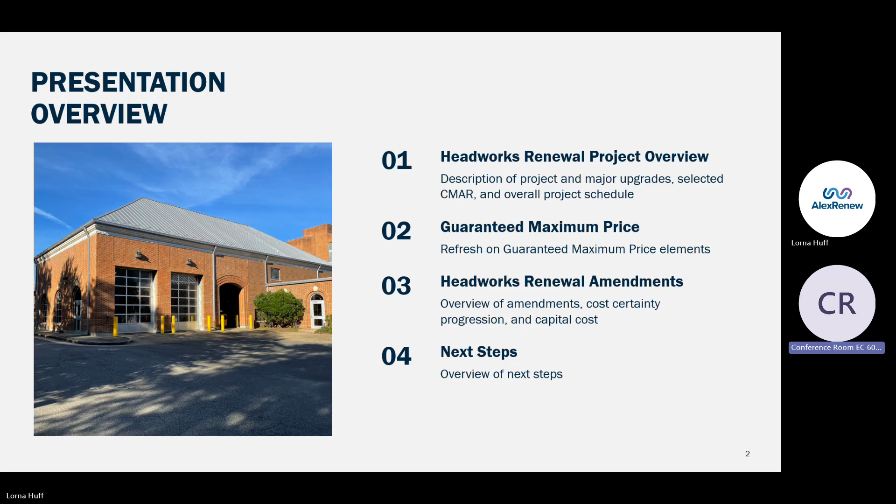Then I'll go over the guaranteed maximum price and the elements that entails. I'll then go through the Headworks renewal amendments specific to this project, an overview of those amendments, a graphic showing the progression of cost certainty moving from the start to the end of the project, our current estimated capital costs, and ending with an overview of the next steps.

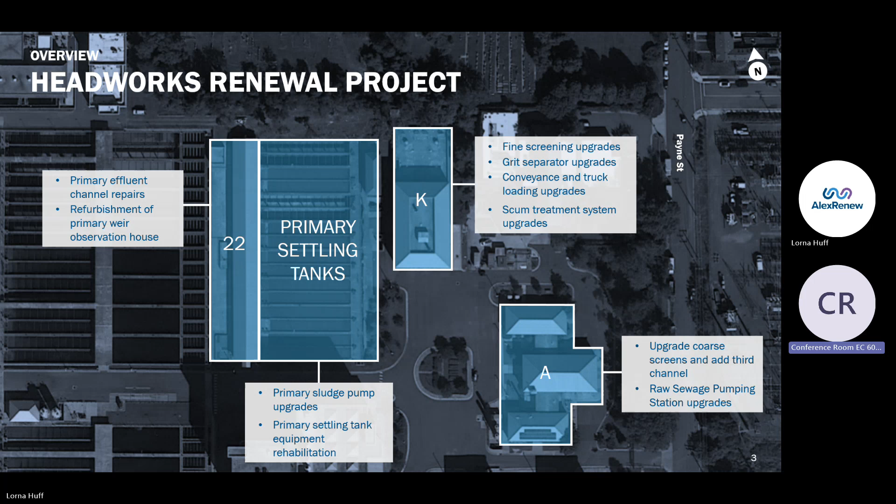We have the primary weir observation house covering those weirs to contain odors. And the last step of the Headworks Renewal Project is the repair of the primary effluent channel, where all that wastewater comes together and flows down to the primary effluent pump station and then continues on through the process. That's kind of the 1,000-foot view.

Diving a little bit deeper. Next slide. Along with some pictures of the equipment as we have it right now.

The coarse screens will be upgrading the two existing screens with new technology, and also adding a third coarse screen channel. The reason for the third coarse screen is to allow us to pass 120 MGD with one screen out of service. That gives us a layer of redundancy and resilience for the process.

In similar fashion, we're upgrading the raw sewage pumps with new pumps, valves, and piping to also give a firm capacity of 120 MGD. What that looks like, we have 2 rows of 3 pumps each. We'll be able to meet 120 MGD pumping capacity with 2 pumps in each row in service, so 1 out of service on each side.

In building K, our fine screens and grit removal systems are both being upgraded to more efficient and effective technology to take that debris out of the wastewater stream and avoid damage to equipment downstream in the process.

And then we'll be improving both the grit and screen conveyors and upgrading the truck loading facility. Right now it's just a truck parked in with several chutes that drop the screens and grit into the bed. We'll be upgrading that with automatic leveling roll-off containers to essentially have a single chute, but moving the container from side to side to automatically level the material in the bed. That's important so our staff don't need to go up and manually rake to level the equipment, which is both time consuming and can be hazardous.

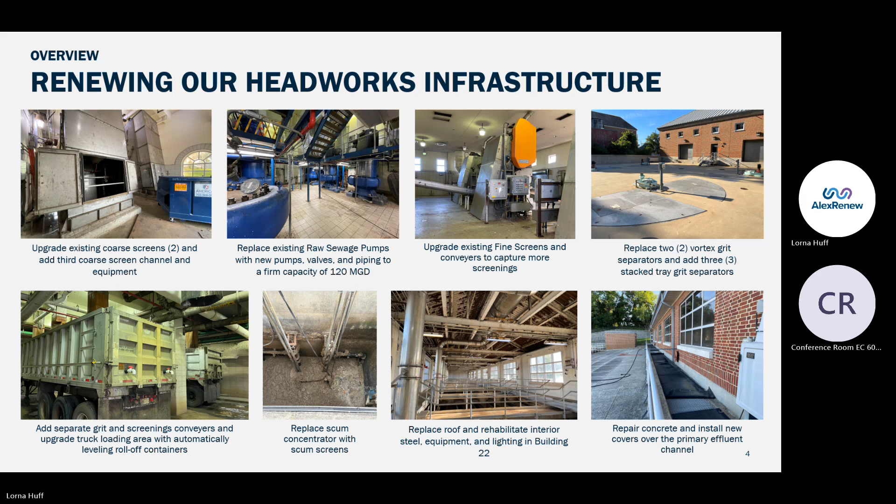So Ulliman Schutte has been selected as our CMAR for the headworks renewal project. They received board approval to provide pre-construction services in July of last year, and they've been working closely with both us and GST, our engineer, in developing the design and providing critical and helpful constructability feedback throughout the project. They have over 25 years executing wastewater projects in the Mid-Atlantic, with a regional office in Chantilly, and extensive experience in construction of liquids process upgrades at active wastewater plants. The image in the background is actually from one of their other large projects with the same coarse screens that are going to be installed here.

And they have experience with over 20 CMAR projects, including AlexRenew's NMF, which is underneath the soccer field here.

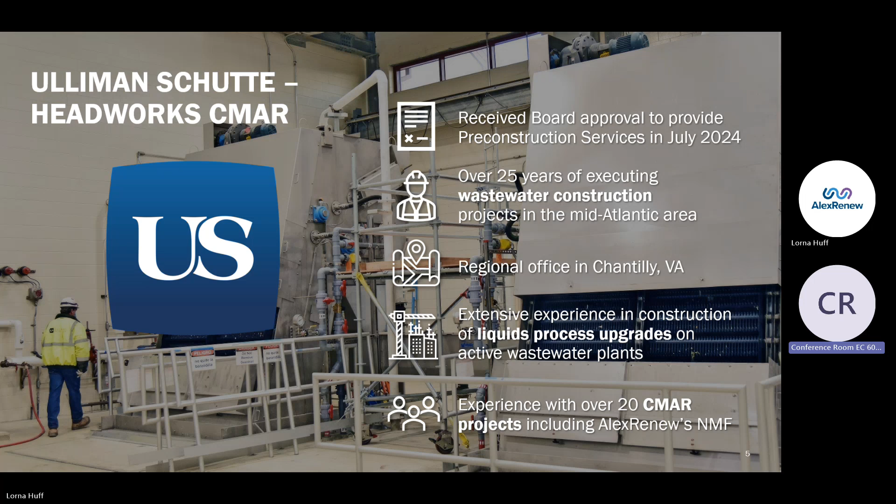This slide gives an overview of the project schedule. Currently, we're at the tail end of second quarter 2025. We're complete with procurement and preliminary design, and coming up is a year of pre-construction services and final design with our engineer and CMAR. We've also noted on the timeline roughly where the amendments are expected to go to the board. Construction will start at the beginning of 2026 and proceed through early 2031.

What is the level of design at this stage? So the design is being progressed for each amendment.

Amendment 1 is at 90% design. Amendment 2, we're in the process of finalizing 90% design. Amendment 3 is still working on 60%. Amendments 4, 5, and 6 are still below that, around 30% and moving up from there. So it's hard to average that out since there are different sizes.

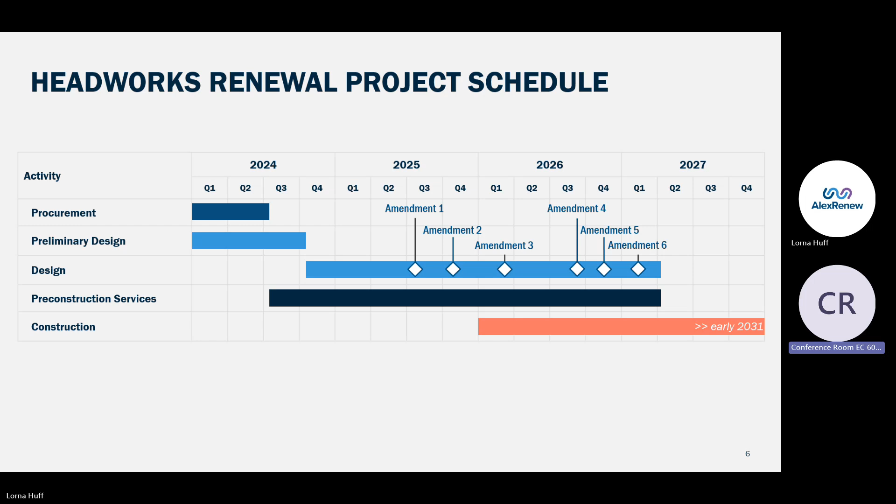Question on GMP: once you agree on a dollar amount, what happens with tariffs, changes in regulation? What kinds of things come up, and how do you handle them? We do our best to account for those, because we're working with the contractor, and they're able to go out to their suppliers and get a feel for how tariffs or other regulations might impact costs. If something fully unexpected occurs, we do have the option to find an equitable solution for covering additional costs that could not have been anticipated.

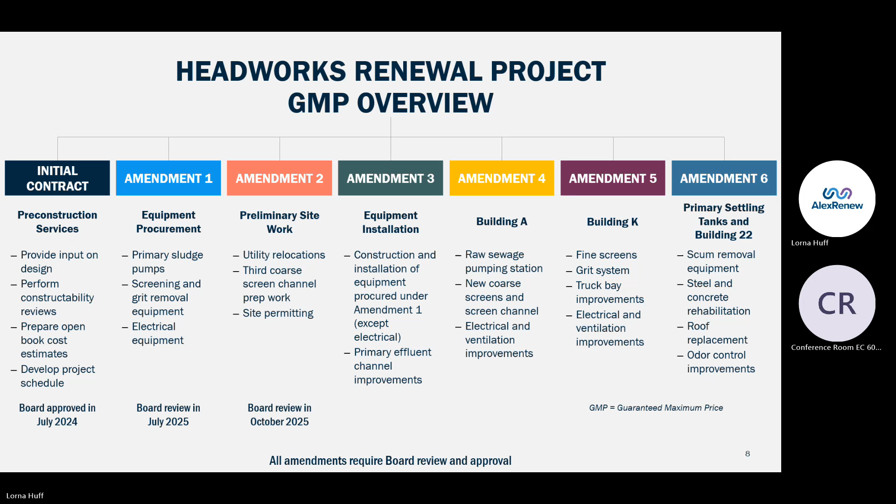Amendments 4, 5, and 6 cover improvements to Buildings A, K, and the primary settling tank respectively. One of the main reasons for this ordering is Building A is going to be the longest portion of work, so we want to get that started first, and avoid pushing out the schedule.

This kind of answers your questions - think about where we stand today, we're at maybe overall 30%. By the time we get to amendment 3, we're overall probably near 60 to 75%. By the time we get to amendment 6, we're at 100%. So that gives you an idea of the heavy design work in the back end of this job, from amendments 4 through 6.

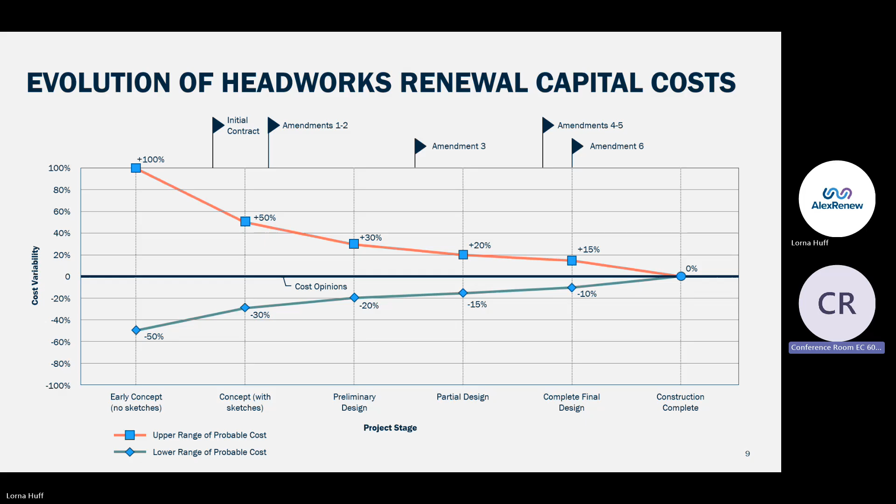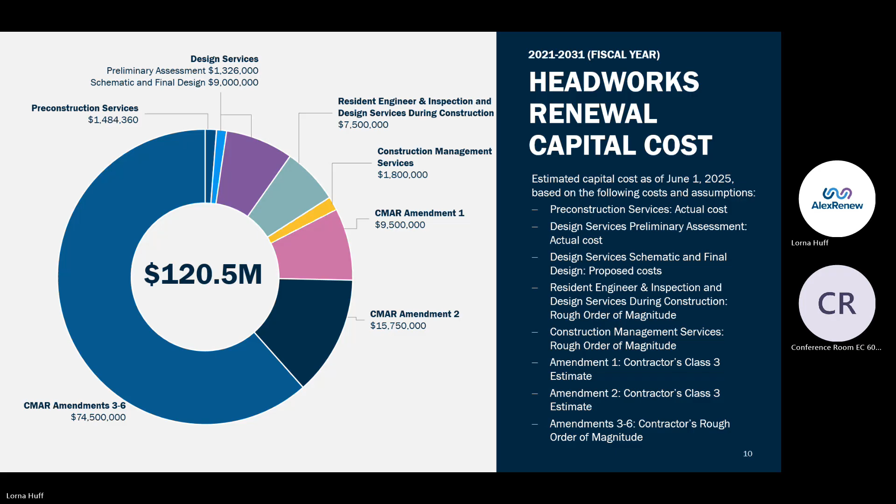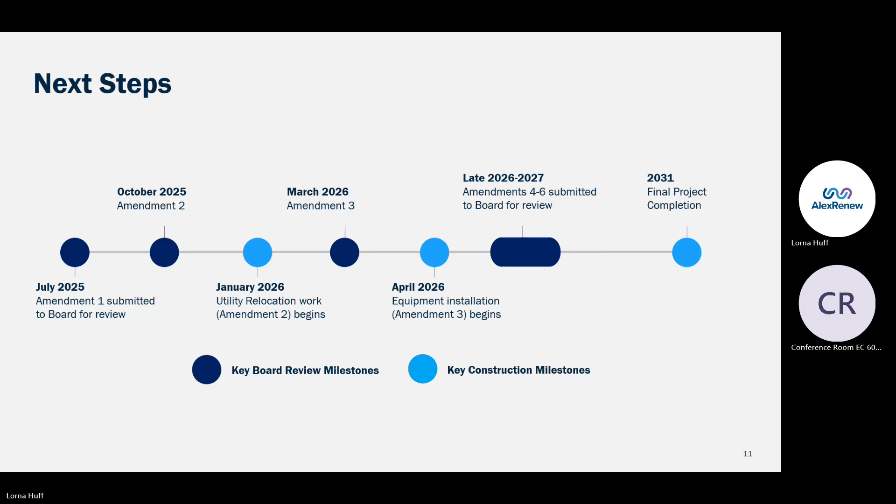That's the end of my presentation.

I've got to say, this is exactly the right level of detail to present to the board. It's really perfect, because you're conveying what you're doing and presenting the risk and cost associated with it. So it's really well done.

So we got a ways to go - 2031, right? But we've come a long way this year. Yeah, no, things are happening. This is great. Wonderful. Thank you, Mr. Chan.

Moving right along to the Commonwealth inflow infiltration study.

So, just a quick overview while we get Mr. Cronin and Dr. Carver up to the front of the room. The city and AlexRenew have been coordinating for the last 18 months or so on the Commonwealth Interceptor infiltration and inflow study. It's been a year since we initially talked to the board last May about where we stood as we kicked off the I&I study.

Really, it's a modeling effort to determine what's effective in managing infiltration and inflow in the Commonwealth sewer shed. So tonight's an update on where we stand with respect to the study and next steps. With that, I'll turn it over to Mr. Cronin to pick things up.

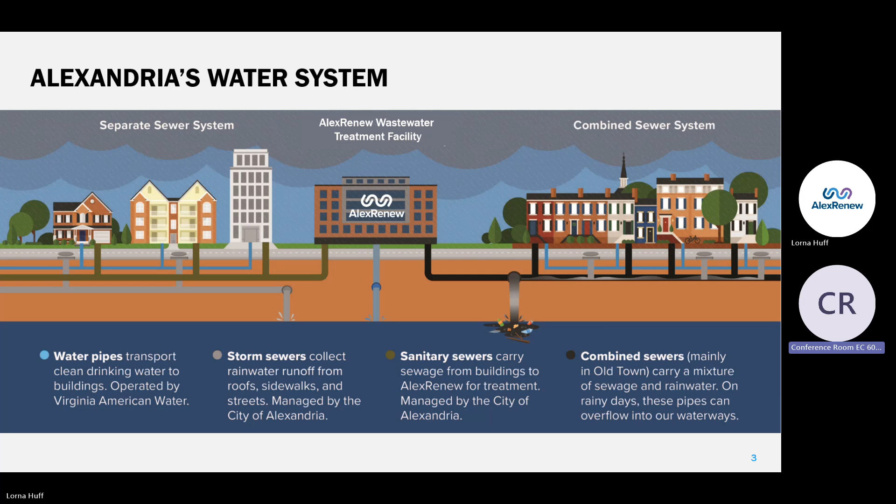This is the separate sanitary service area. A small part of the service area is combined, primarily coming in downstream of Duke Street. And to kind of explain why we're focusing on this, I'm going to ask Aaron to present on the focus areas.

We had over 3.5, 3.6 inches in just over 40 minutes, less than an hour. A very intense storm. When all the calls started coming in from the community, we saw obvious patterns of where these complaints were located. While we had some sparser, more discrete events out in the West End, in areas served by the Commonwealth Interceptor, we saw widespread reports of flooding and sewer backups.

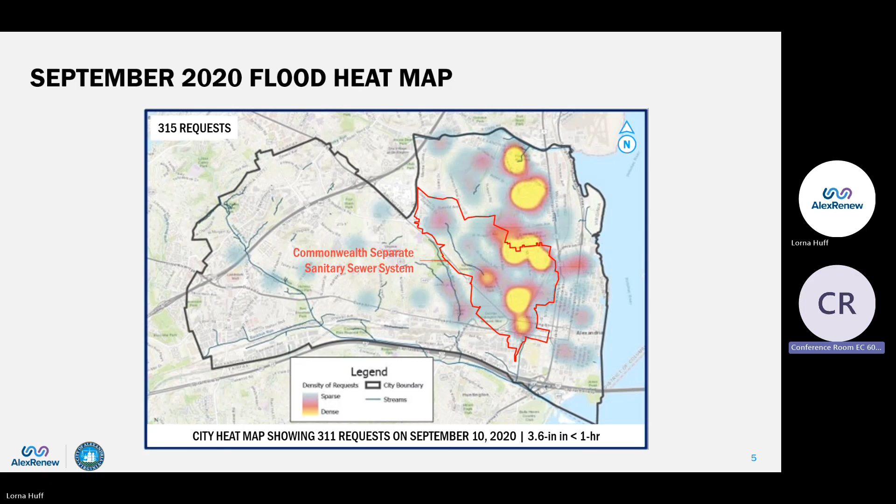I think just for Dr. Wong's understanding, when we're talking about this sewer shed, it's separate - it's the only combined sewer area we have, just this small corner that comes in downstream of Duke Street, which has already been addressed by AlexRenew. What we're focusing on is the challenges along the Commonwealth, which is pretty much all separate sanitary.

And these neighborhoods are older neighborhoods of the city, a lot of 1930s, 1940s construction.

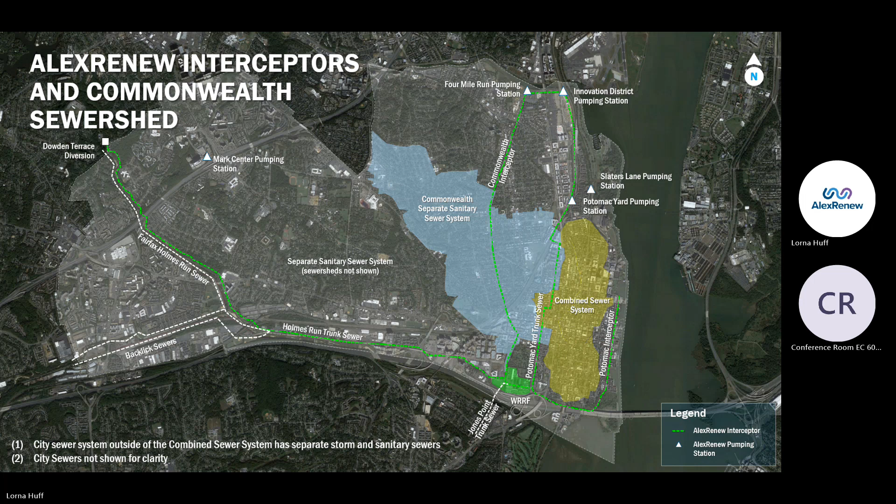For storm systems, that's managed by the city. The city has its design and construction standards, and right now the city is targeting a 10-year level of service for controlling stormwater and flows into their sanitary system. Question on the 10 years - is that a moving number as the intensity of storms increases?

Are we going to see over time what a 10-year storm is? Basically, the volume in a 10-year storm is going to go up. A lot of communities are starting to address that issue by adopting increased standards. NOAA has started to publish projections as to what those will be, and that's some of the things we'll be discussing in future upcoming meetings. The city's going through a flood resiliency effort, so that's being taken into consideration as part of that plan.

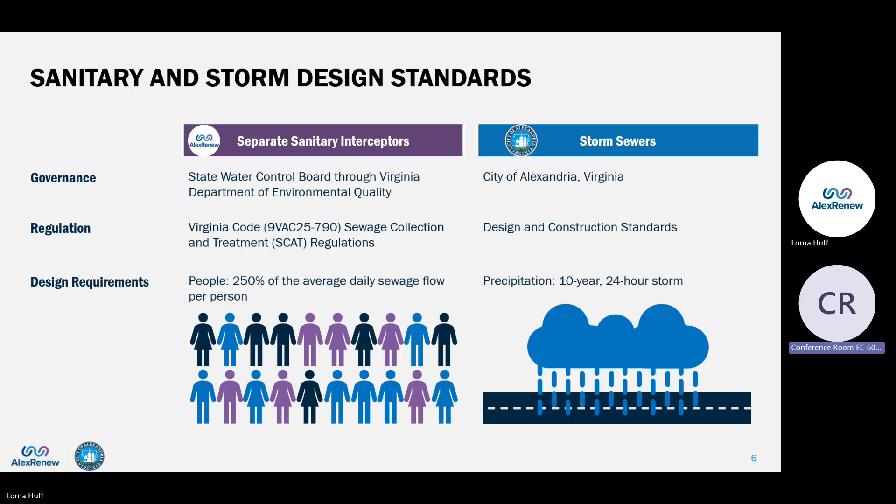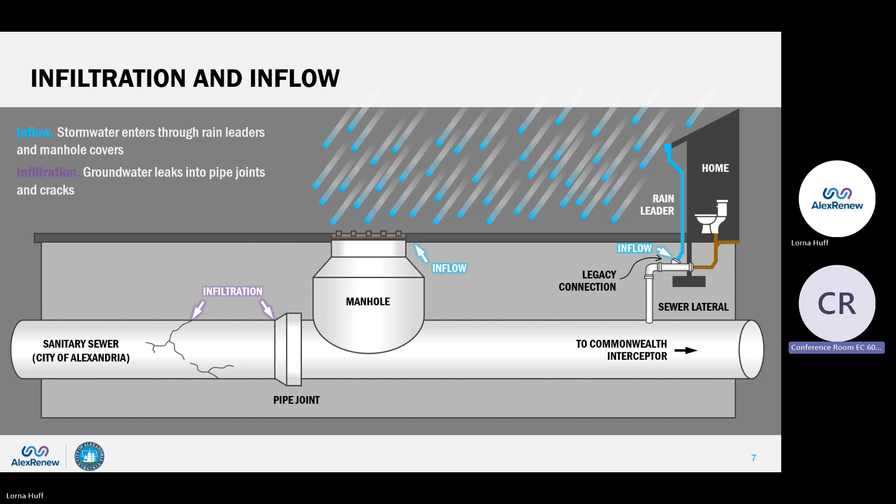So, inflow and infiltration. When you think inflow, think it's going to rain, it's going to come off a roof, down a downspout, and directly into the sewer. That's not something we want, but that sometimes happens. Infiltration is more indirect - it rains, it goes through the ground, finds a crack, finds a joint open, and that's how stormwater gets into the sanitary sewer system.

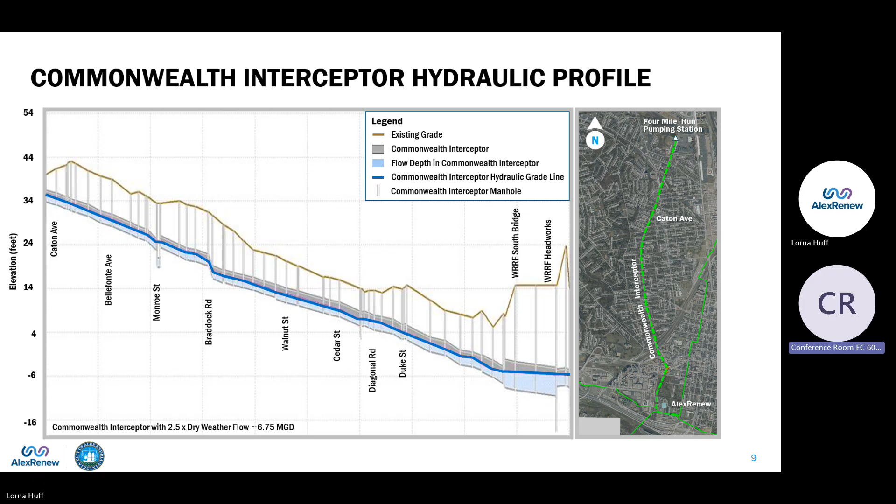So you'll see this section a couple of times. This is a hydraulic profile showing the pipe at the top of the ground, all the way down from the head of the Commonwealth interceptor up at Caton Avenue down to the WRRF. And what it shows is that at 2.5 times the dry weather flow, the pipe has capacity, meeting the SCAT regulations for the design standard for the Commonwealth.

Taking a look at the data we collected from the flow meter data, you can see that our peak factor is at 2.5 times. We're seeing measured peaks somewhere in the 5 to 6 range. Our dry weather flow is about 2.7 in the Commonwealth, with peak flows ranging from 15 to 17 from what we've seen in these 1 to 2 year storms.

So how do you mitigate infiltration and inflow? Sewer rehab - for cracks you could see in the video, you can line the sewer, using a fold-in form. You put the liner in, it expands, and it seals off the cracks. You can also do slip lining, or replace the sewer entirely. The city does have some of that. Did you guys do the condition assessment?

In areas where there is surcharging in the street, you could install a backflow preventer to keep sewage from backing up onto the property. For legacy stormwater systems, you could disconnect the roof leader from the sanitary sewer, having it discharge into the yard instead. You could also look at upsizing the stormwater or sanitary sewer system. And for inflow going into the lid, you can put a manhole insert to prevent direct stormwater from coming through.

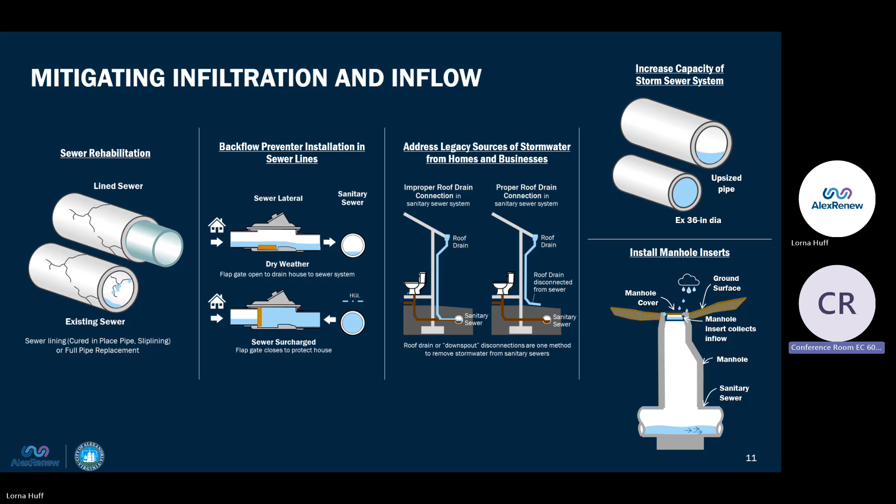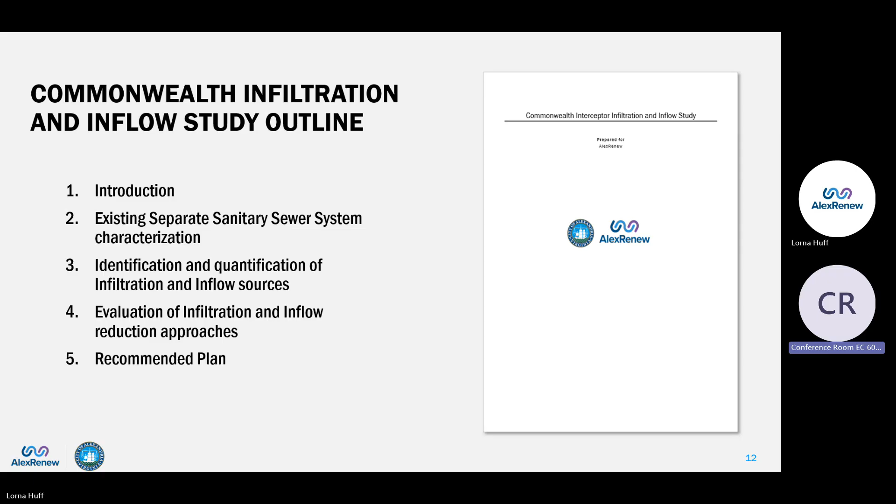As mentioned, we've been preparing the study, primarily focusing on characterizing the system and developing a model. The main component is understanding the service areas - the areas that drain into individual pipes. Aaron's going to go over that in more detail. We put flow meters in the sewers to understand each of the sheds so we can calibrate the model, and then use that tool to look at ways to reduce some of the I&I in the system.

The city has done some inflow and infiltration work in the past, and part of that study involved surveying all of the homes in the Commonwealth sewer shed to identify stormwater sources into the sanitary sewer. We were able to complete the survey for just over 80% of the homes - obviously, you need full access to the home to do the characterization.

So we surveyed over 5,000 homes, and out of those 5,000 addresses, 685 we were able to confirm sources of inflow into the sanitary sewer. We generally did that through dye testing. We'd see a source, and about 14% of the properties have these I&I connections.

As I mentioned, these are old neighborhoods, pre-1963 when we updated our code. The different types of sources include driveway drains - if there's a drain at the end of the driveway, we'd put dye into the drain, very fluorescent dye, add some water, pop open a sanitary manhole and wait to see if the dye would show up. That's how we confirmed these sources.

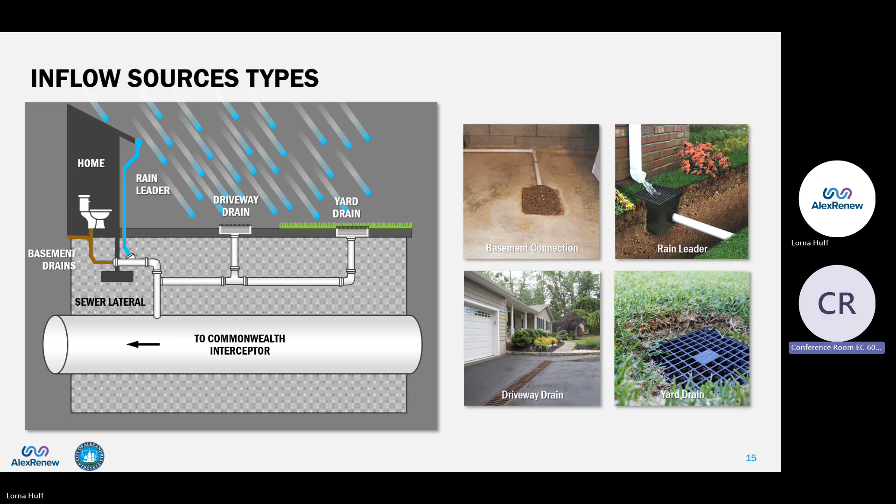We would see a yard drain, but sometimes we'd find yard drains that were connected. Most of the time they were connected to the stormwater as they should be, but sometimes to the sanitary. We were able to test downspouts, and finally basement drains. Now these aren't basement connections inside the homes - these are basement floor drains outside the homes, where people have basements with a stairwell that goes down. We tested those as well.

Next slide. Out of those 685 inflow sources, the vast majority, 92%, were these basement area drains. They were very common in this area - not just a couple of yard drains, a handful of driveway drains and roof leaders, but mostly these basement areaways that we found connected.

So what we did is we took all of this data and basically put it into the model. Ed's going to talk a little about how you take this data to come up with essentially a flow rate to put into the model to see what the impacts are.

Sorry, what's the yellow diamond icon?

Oh yeah, so as part of the data collection effort, we have flow meters in the system. Those are the locations of some of the flow meters we have in the city's collection system.

So, determining the inflow rate. Inflow, again, is what rain goes directly into the sewer. There's a formula commonly used in engineering to calculate the flow - it's really like a percent imperviousness, rainfall is the intensity of the rain, and then the area. So if you look at the area of a rooftop or a driveway, you can calculate how much water is directly going to inflow into the sewer.

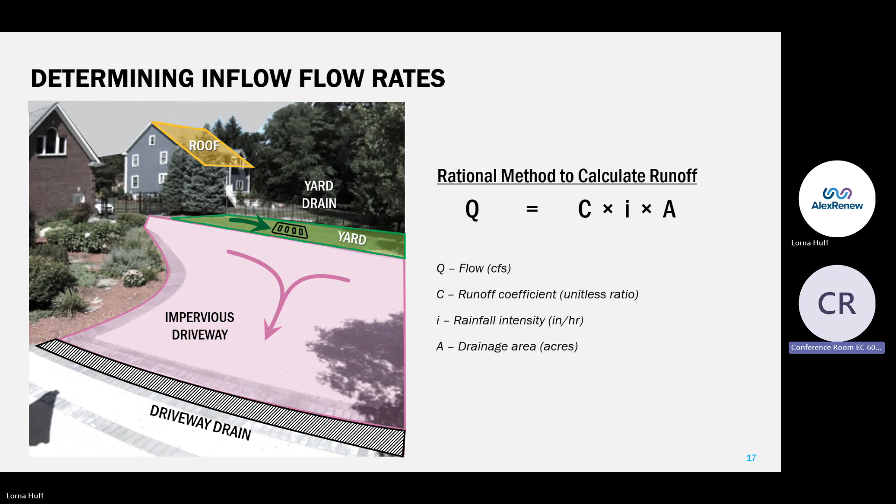So we could take the data that the city had collected. Maybe before I do that, these are the diamonds we talked about earlier. What we did is we identified, based off the GIS, where the larger areas were on the city's trunk lines and put some flow meters in October of 2023, which augmented some of AlexRenew's longer flow meters on the Commonwealth, which had been installed in 2019.

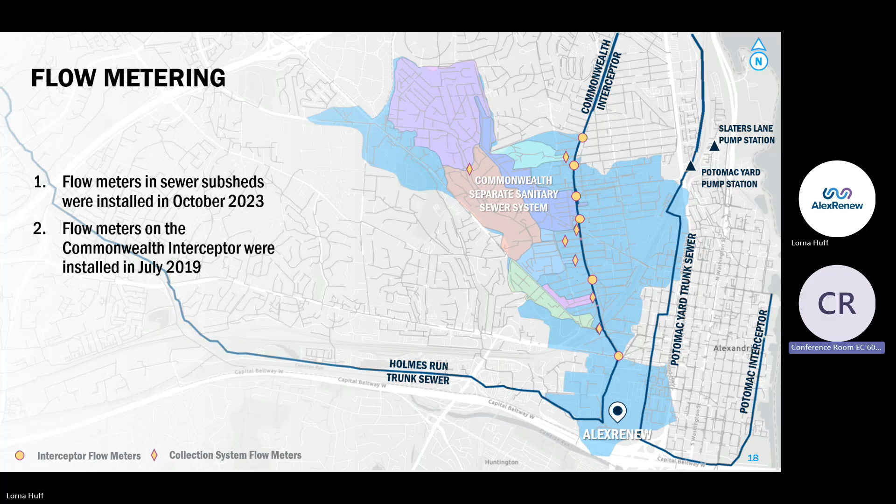Each one of these meters has its own meter shed that we can look at individually, and we'll calibrate the model at each one of those meter locations. Now, what do we do with all this data? We take the data from all those inflow points, all those areas where rain can fall, and we sum them up. We come up with that direct inflow that we can then put into the modeling and understand what the response was.

Then we look at the infiltration sources - these are not direct, where we look at the laterals coming from the house to the sewer, and the sewer itself in the street. We add them all up, and then you'll see the dry weather flow pattern, you'll see the rain, and then you'll see what the peak flow is in the pipeline or at the meter location. Then we'll compare it to the meter.

So the jagged line is the actual meter location, and when we calibrate the model, we want it to be able to predict the wet weather response during that event. We're trying to make sure the peak matches, the width matches, and we look at multiple storms to make sure we get good correlation between flow rates.

Because we added a model with the detail that the city provided, we can find out what the impacts of each of the sources are. One of the things we found was the inflow sources really didn't make as much of an impact as we thought. If you break it down into a pie chart, the inflow sources are really small.

I'll start from the bottom. This little piece is the inflows coming into the system - the rain leaders, driveway drains, and so forth. The next line is the lateral, which is the connection from the house to the sewer in the street - that was the second biggest source. The biggest source was the sewers themselves, the bigger diameter ones out in the street. Then you add all of those up, including the dry weather flow, and that's how you get to the peak.

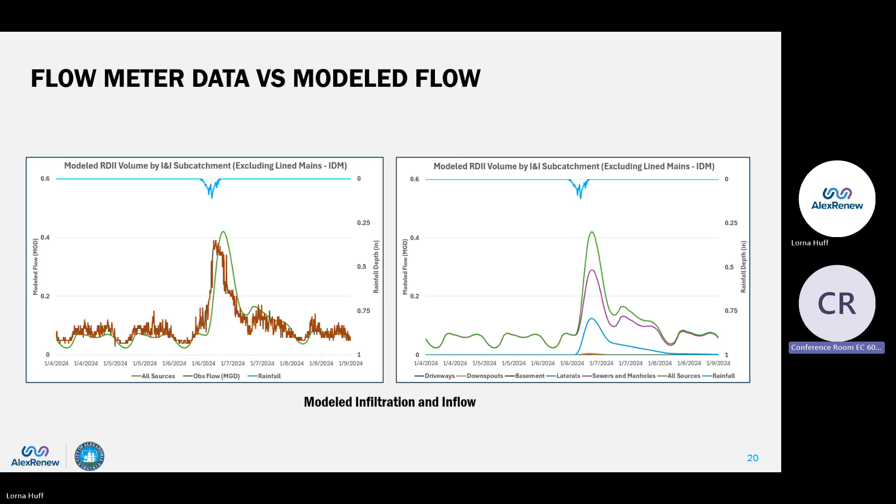Looking at the flow rate toward the end of the Commonwealth, and what the peak flow was during one of our monitored events, we see that the inflow sources make up about 1% of the total flow, with infiltration into the sewer and infiltration into the lateral making up the majority of the source.

You showed a video in the beginning, but the video doesn't jive with the model. The model doesn't agree with the video - we should modify the video. I agree, most of the videos show all these types of inflow, and there's infiltration mentioned in like one sentence. So maybe to pause for a moment - this was surprising, I think, when we did the calibration, we saw that the majority of these sources are coming in through infiltration.

64%? What was the percent? No, it's 99% - 99% is from lateral infiltration, based off of... there could be some inflow into the manholes themselves, and we've been installing manhole inserts to try to block that. That is one source of inflow on the public side that we do have.

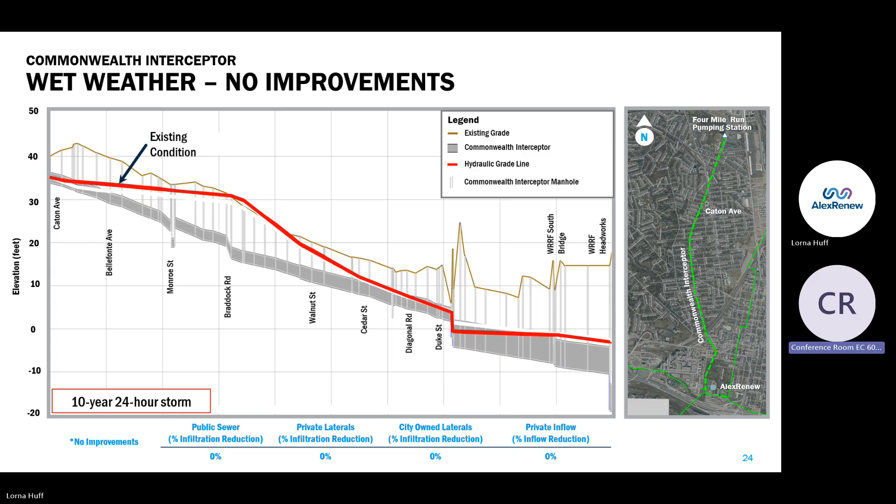the existing Commonwealth has capacity. In the 10-year storm, we see the hydraulic grade line, or water depth, surging above grade around Braddock, with the backwater from Braddock back up to Caton. You can see that the Four Mile Run interceptor that was recently installed provides good conveyance for the combined sewer flows on the downstream side, and took a lot of the backwater that occurred from the downstream end by the wet weather pump station, lowering the hydraulic grade line to give as much benefit as we could upstream. But the existing conditions still show surcharging upstream due to the lack of capacity of the interceptor to handle those flows.

So scenario 2 is if we had full rehab - we really got back inside the pipe of the existing system - where you're showing the hydraulic grade line either at the grade of the sewer or below it, all the way down to the end.

And what would it look like if we increased the size of the Commonwealth? You'd be matching those flows at the crown or less. Primarily the upgrade would have to go from Duke Street up to...

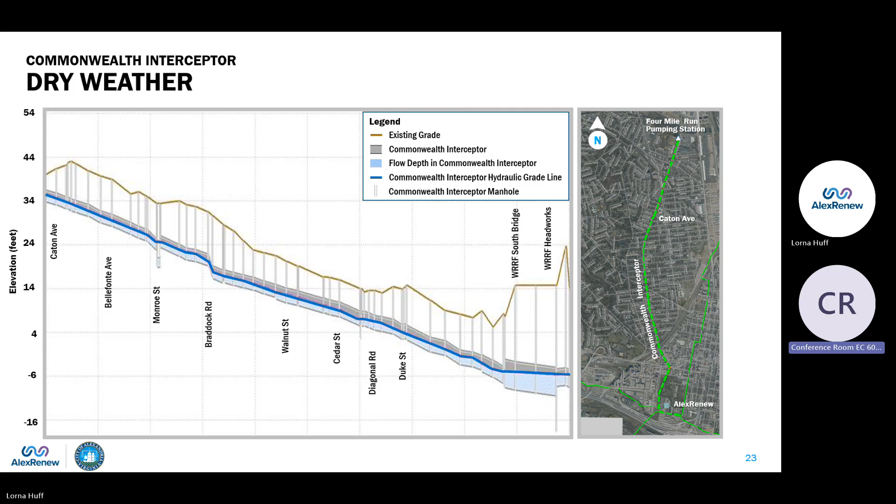The pipes - when you're thinking about pipelining, these projects are big and impactful. So the board needs to understand that full rehab isn't going out and throwing a manhole insert here or there - it's literally lining every pipe in that stretch.

But I didn't hear it. You said you have a good inventory of those houses that are quote unquote illegally connected - you said that was the standard back then. I didn't hear an option in the modeling, basically considering those disconnected and showing how much that was. That was only 1% of the problem. So it seems like that's not... To me, I think 99%.

So this isn't the first time we've done some modeling of infiltration and inflow - the city has done some lining in the past, and we'll talk a bit about upcoming work as well. We had done the same thing where we put flow meters in the system, did this survey, and input it into the model. It was in the single digits - looking in terms of the I&I, depending on what storm we were modeling, it was in the 3 to 5% range. So it was very similar to what we had here, which I think surprised us back then as well.

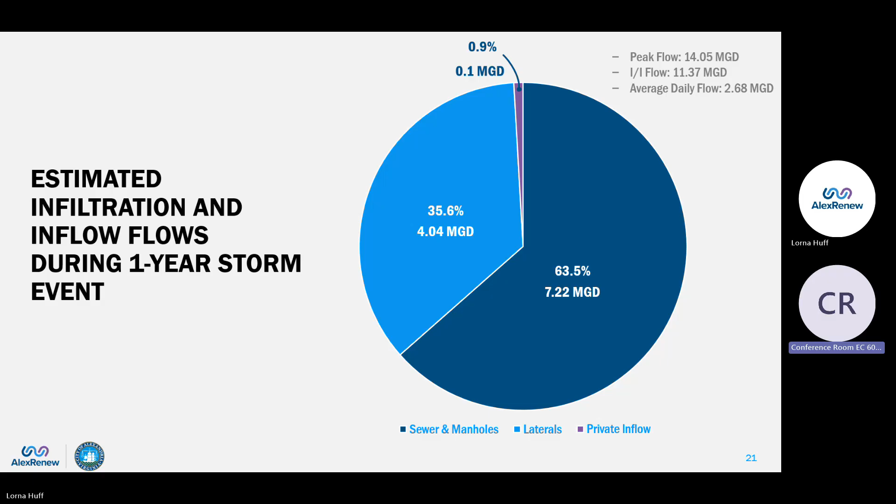Right, so you're confident in the modeling results? I mean, Dr. Wong sounds skeptical of the 1% estimate. There was a slide earlier, a table that showed the peak - from what we have from our monitoring so far, we're seeing peaks for like a 1-year storm on the order of about 5 to 6, that type of range.

I think these storms, this is like a 1 to 2 year storm. I will say, when I started my time - not as a city employee, but working as a consultant for the city over 20 years ago - we were seeing for similar storms, higher peaks. It was more like 10 times.

We did some lining that was done basically in the 2000s, about 2005 to 2008, we did quite a bit of lining then, and we did see a reduction in the I&I. We measured it with flow monitoring - pre-lining and post-lining - and looking at a 1-year storm, we were having a peak to average of 10. So we do see some reduction in I&I, but it's still an excessive amount that is in the system.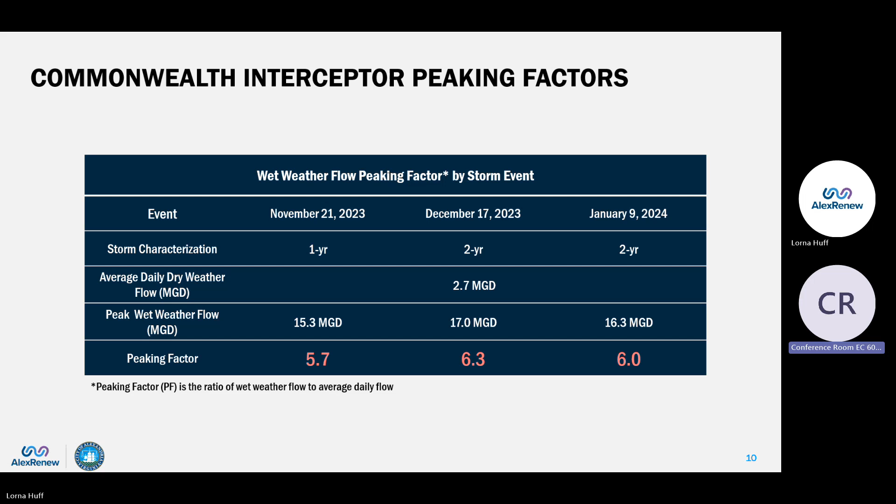Back to the question about the model up there - I think the model for the private inflow source is completely dependent on the inflow connection survey that Aaron presented here. This is our best data to input into the model, and a good percentage of the homes within the shed were assessed, and 700 were found to have inflow connections. 700 is a lot when you think about the number, so when you take 700 and jump to the modeling results, it makes sense.

Question - I understand that did not include interior basement drains, you didn't have access to those yet. All of our surveys were conducted on the outside of the home because we were looking for inflow sources capturing stormwater. We're trying to capture the storm. Yes, exactly.

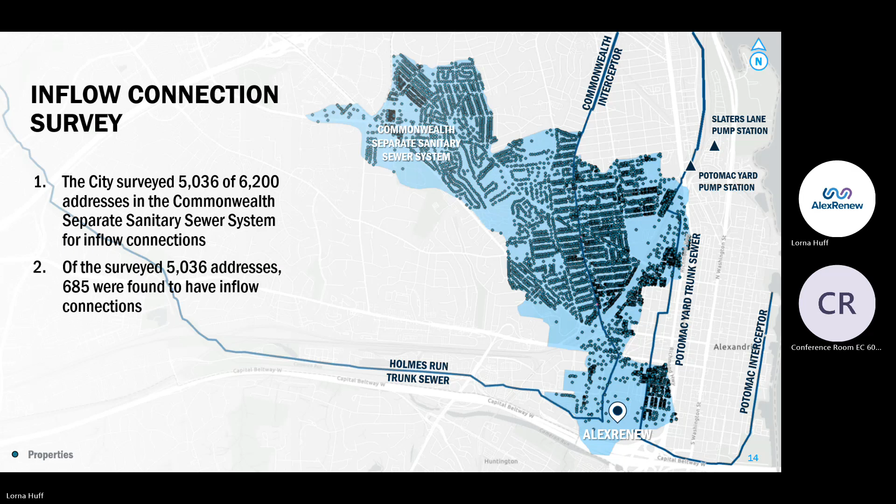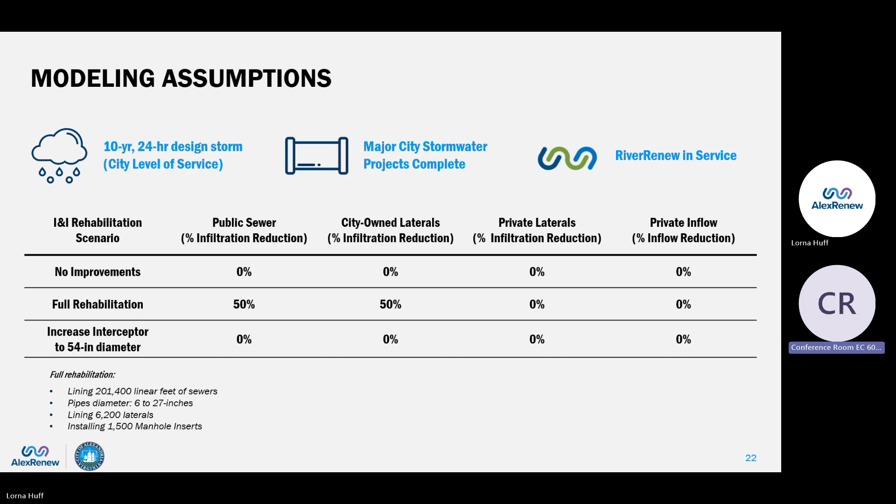Just to make sure I understand these charts - we're looking at two, there's the no improvements one as baseline, then the full rehab one and the increase in the interceptor one. These are either or, right? This is looking at only if rehab with no increase of the interceptor size, and the second one looks at increase the interceptor size with no rehab. Is that correct? Correct.

Did you look at any sort of - I was wondering if you could combine them - but that wouldn't make sense. We thought about that, I'm not sure that makes a lot of sense. Yeah, I think that's the way it's done.

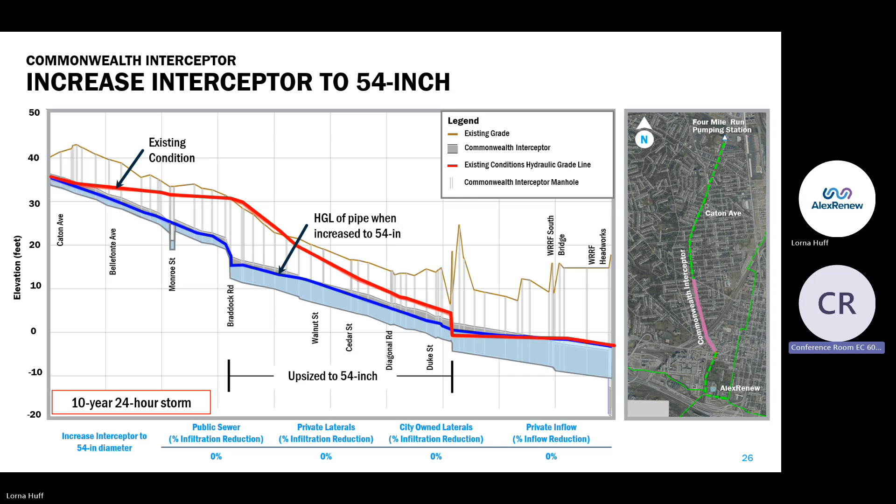So what I'm taking away from these two charts is that either approach would solve the problem, but increasing the size of the interceptor is much easier. But I think that's the next phase of the assessment - okay, so I'm jumping ahead then, making an assumption. Okay, we also get a cost comparison.

And Aaron, by the way, this is excellent - I live in that section of Del Ray. This is the pipe lining we're talking about, the 40 or so miles of pipeline. How long does that last?

We did lining in the Commonwealth Basin, in 4 Mile Run, in the 2000s. We have gone back and re-inspected them, or either we've re-inspected or we're still in the process of inspecting, depending on where we're at with our program, and they have held up very well. Okay, so we don't need to rehab the rehab that's already been done - it's more about what hasn't been done.

How many miles did we do in that program? I'll have to go back and get the exact numbers, because when I think of everything we've done, I'm thinking citywide - there was a lot we did out in the west end, even in newer areas of the city. I'll get you the numbers for these exact sewer sheds, that'll give you more magnitude of having lived through it when we did it - whether it's a tenth of what we need or 50% of what we need. Generally, percentage wise, I can say we've done about a quarter of it.

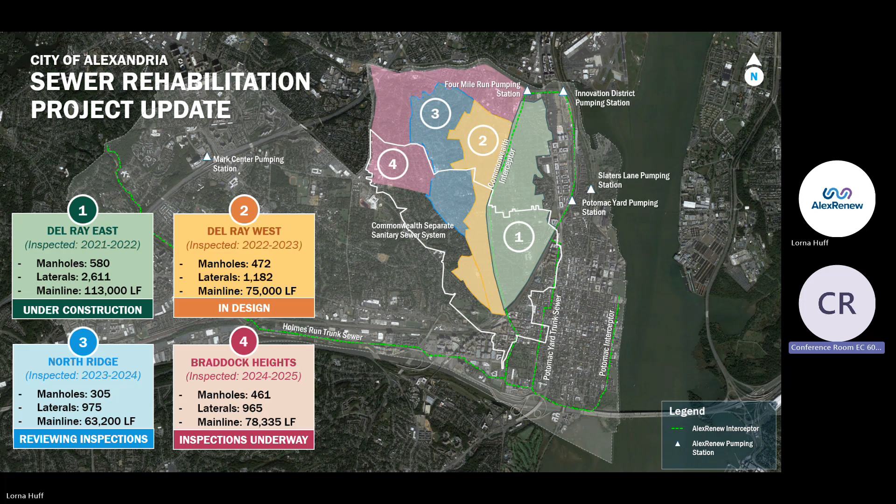Well, your choice is a hard one or a worse one. There's no easy answer here.

That kind of highlights our next steps, really looking at that alternatives evaluation. How long would it take? What would it take? Coming up with what that schedule is for whichever alternative.

Just kind of summarizing the takeaways, the city data is showing that the inflow sources are not a significant source of the I&I. Any alternative to address I&I, the city stormwater, the big system upgrades need to be complete. Whether it's lining or increasing the capacity, either option will work. We also need to keep an eye on, if you make it bigger, how much more water are we bringing to the plant when it reaches the city's allocation. If you line the pipe, it prevents the water from coming to the plant, but increasing the size of the interceptor would not.

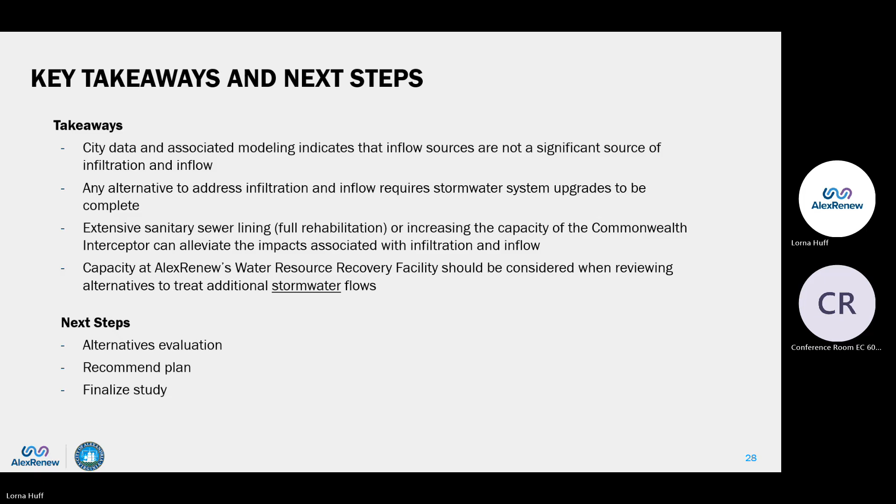This is excellent, this is excellent. So more to come, right? Thank you, thank you.

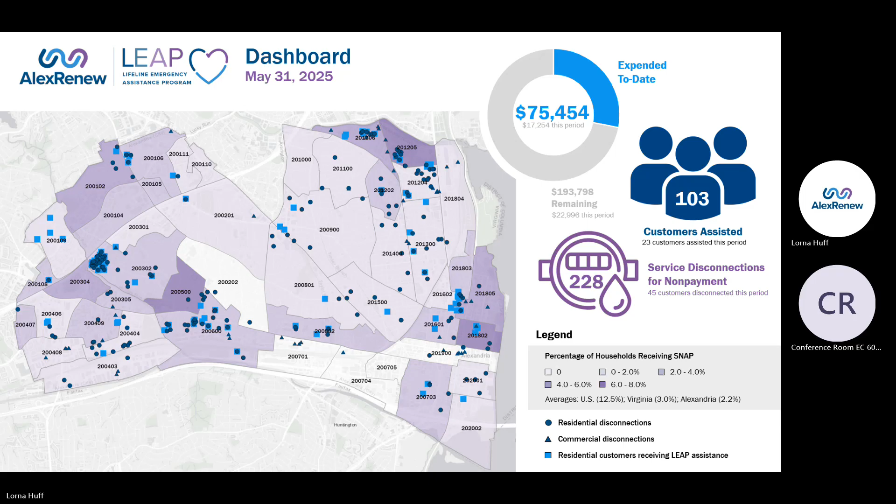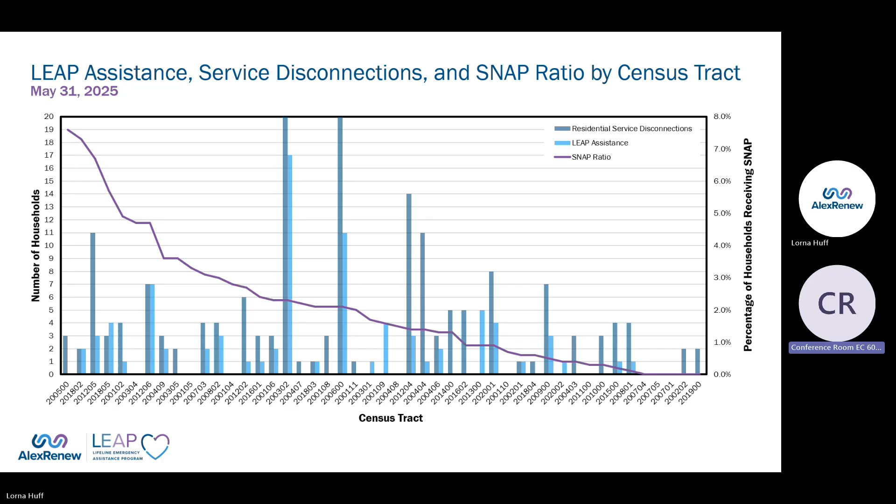If you turn to the next page, you can see the same trend we've seen in a few census tracts that are really taking advantage of this, not necessarily tied to the SNAP ratio, but you can still see the trends in specific areas. On the last page, I had to shorten the data on the dashboard, which is a good trend. This is just 1 month this time because we gave out 23 disbursements, and it gets hard to plot anything more.

Good trend overall. The other thing I'd point out is there were quite a few customers this month with high balances that were taking LEAP disbursements, so that's also a good trend. We're starting to hit some customers that have arrearage over a long time, which dropped the average and median of the percentage covering their total arrearage value. Overall, I think it's good.

I have a question, not related to those sections, more on table 5.1, for Ms. Sheehan or Ms. Kube. At table 5.1, the revenue section of the table, I think I know what's going on with debt proceeds and other sources.

I think it's just a timing thing, the difference between where we are on budget versus year to date. It was delayed.